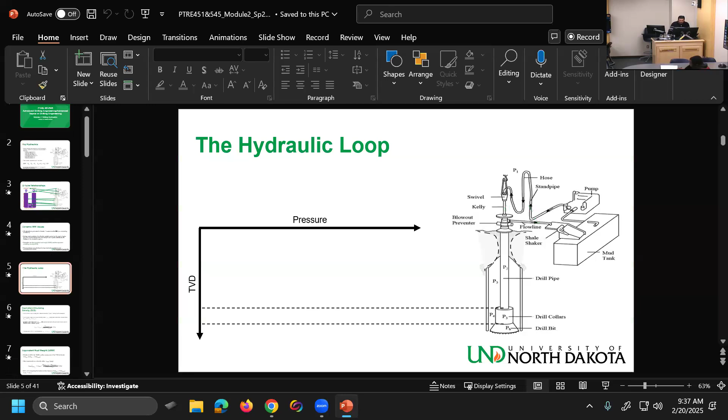I drew something wrong on the hydraulic loop. Remember, the hydraulic loop shows both hydrostatic effects, like gravity or density based on the fluid above you, and friction. I said let's assume that this is the hydraulic loop.

But now I have a different case where there's hole underneath the bit, so I'm breaking gel, in a sense you need that for the second homework. I have the bit sitting a few feet above the bottom, and it's just jetting, basically flushing out the old mud and replacing it with new mud. I told you we need to draw this extra carrot here.

What do you mean by replacing with new mud? You have mud coming in the drill string, and then you're just flushing it out. I thought that's the down side. Yeah, and the one going down is going to come back up, that's the goal. Now I told you last time that this line would be parallel to this one, and that was wrong. Then I did something else that was wrong too.

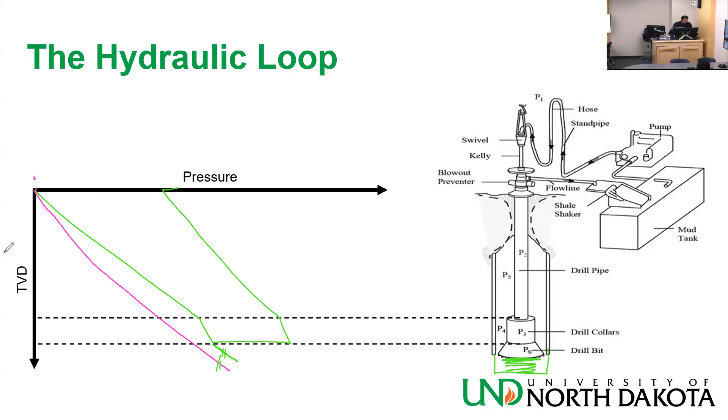We're going to see the homework now. So the mistake I made was, one, I told you this line is parallel to this one, which is not the case, and then I drew the purple or pink line wrongly like this. The slope should be, remember, the slope in this hydraulic loop is feet over psi, not psi over feet. I always get confused with that. Anyway, that looks much more correct.

Okay, let's go to homework 2.

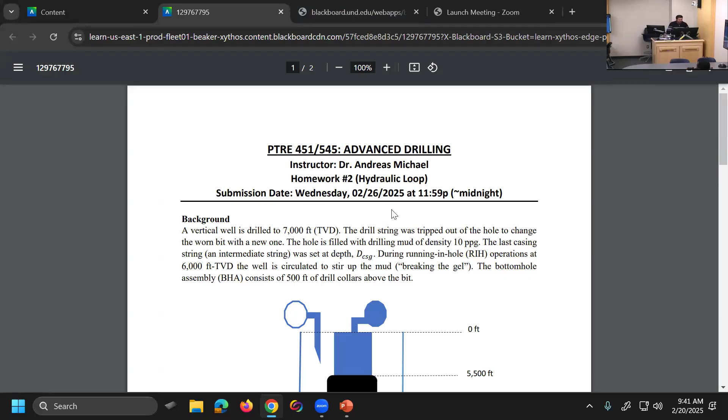Background: a vertical well is drilled to 7,000 feet true vertical depth. The drill string was tripped out of the hole to change the worn bit with a new one. The hole is filled with drilling mud of density 10 ppg. The last casing string, which was an intermediate string, was at depth DCSG, the casing shoe depth.

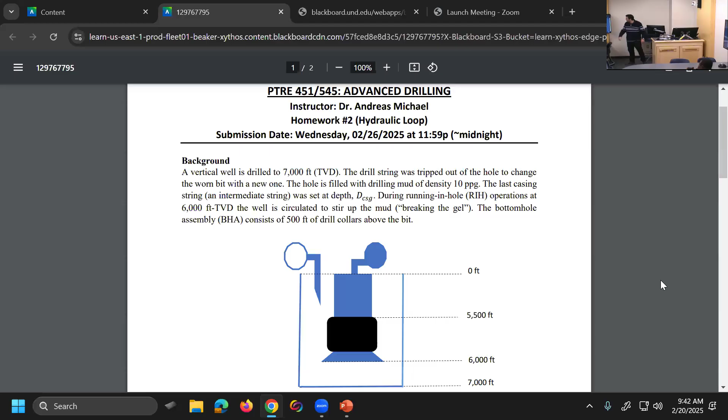During running in the hole (RIH) operations at 6,000 feet TVD, the well is circulated to stir up the mud. It's called breaking the gel, you already know that. The bottom hole assembly (BHA) consists of 500 feet of drill collars above the bit. So it's this schematic that I show here.

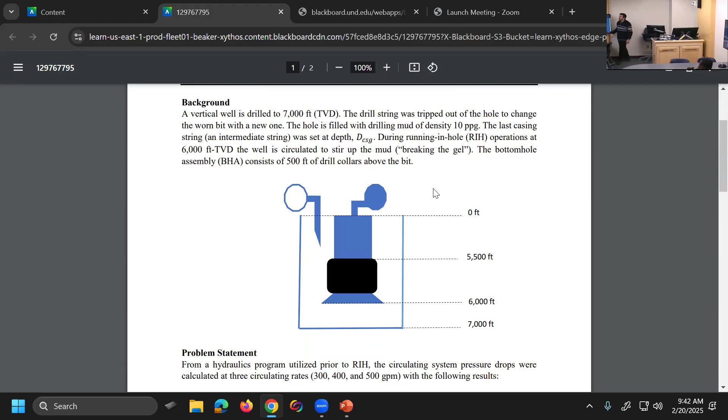The well is 7,000 feet, the bit is at 6,000 feet, the BHA is at 5,500, and the bit doesn't have any height. I drew it there, but it doesn't have a height.

Problem statement: from a hydraulics program utilized prior to RIH, the circulating system pressure drops were calculated at 3 circulating rates, 300, 400, and 500 GPM with the following results. These are friction losses, not hydrostatic losses and gains, just frictional losses.

And I give you the total and the breakdown on each component. Surface equipment, you lose 36. Inside the drill pipe, you lose 262. Then inside the drill collars, you lose 100. Then across the bit, you lose 500, etc. And then on the annulus, you lose 95 and 83. And it adds up to something like 1100 for 300 GPM.

When you increase the rate, everything changes, and it adds up to a bigger value. And then changes again and changes again, depending on the rate. Now, mud pump output standpipe pressures at the surface - that's basically the total system pressure losses, the pressure that you measure at the standpipe, just like we did with the simulator last time.

That 1940 value that we were reading is basically the standpipe pressure, which is basically all the friction that you need to overcome to bring fluid to the surface at atmospheric level throughout the circulation system.

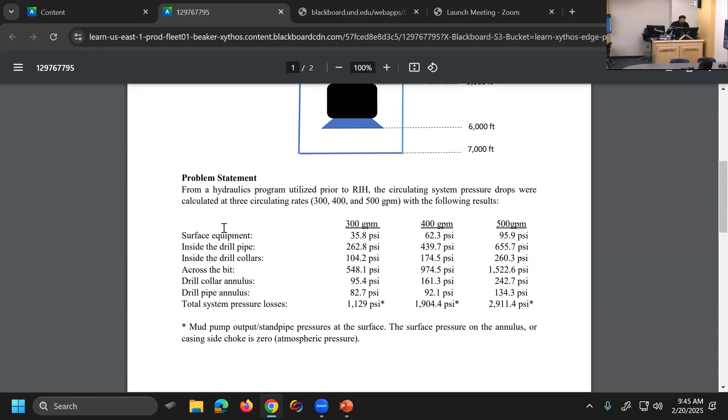Question number 1: Using Microsoft Excel, construct hydraulic loops for each of the 3 circulating rates. I want both the dynamic loop and the static loop, just like the green line and the pink line.

What is the dynamic bottom hole pressure in PSI and the equivalent mud weight at 7,000 feet true vertical depth for each of the 3 circulating rates? That means I'm asking you, what is basically the EMW at the very bottom of the hole?

So the bit stops at 6,000, right? And then you have 1,000 feet of just fluid that is not moving. So you need to add that amount after the bit. So you need to go to the hydraulic loop at the bottom of that carrot, get the pressure there, and then convert that to this, right? And it's EMW, it's not ECD.

Question number 3: what would the dynamic pressure and the corresponding EMW at the bit be as the mud flows out of the jet nozzle? So after the mud comes out of the bit, in each of the corresponding circulating rates, this is basically - you go to 6,000 feet, after the mud comes out of the bit, after you lose what you lose in the jet nozzles, what would be ECD, basically, if you are touching the bottom.

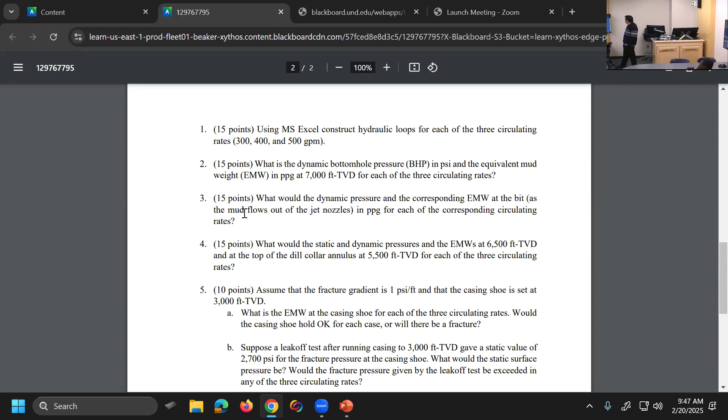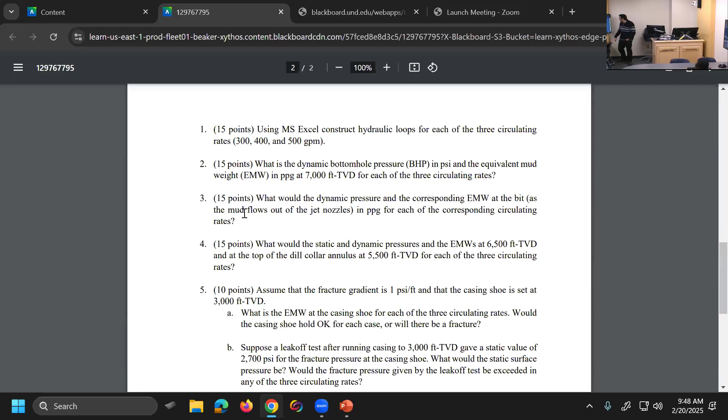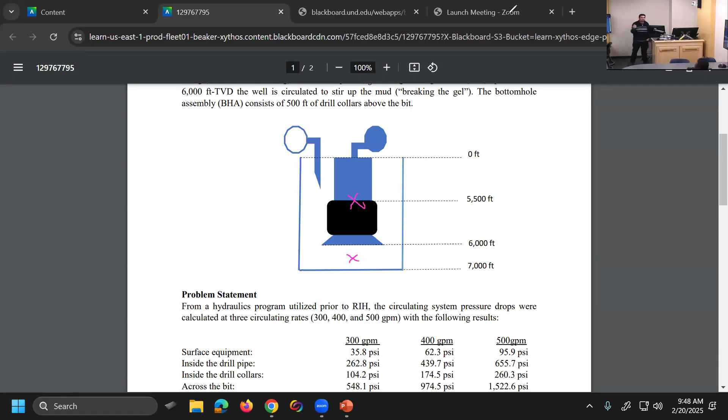What would the static and dynamic pressures and the EMWs at 6,500 feet TVD at the top of the drill collar annulus, and at the top of the drill collar annulus at 5,500 feet TVD be for each of the 3 circulating rates? I want the pressure, the static pressure. Static pressure is easy.

Let me see if I read it correctly. What would the static and dynamic pressures and EMWs be at 6,500 feet TVD and at the top of the drill collar annulus, 5,500 feet? So you need to basically go, once you have the hydraulic loop, everything is easy.

Question number 5. Assume that the fracture gradient is 1 psi per foot and that the casing shoe is set at 3,000 feet TVD. What is the EMW at the casing shoe for each of the 3 circulating rates? Will the casing shoe hold okay for each case, or will there be a fracture?

So here I have a question for you. If you want the pressure of the casing shoe, which side of the hydraulic loop are you looking at? Because there are 2 sides, right? The right side and the left side. You're looking at the casing, left side. Right side of the U-tube model, but left side of the hydraulic model. Because it's when you come out of the, so you need to look at those pressures at that depth.

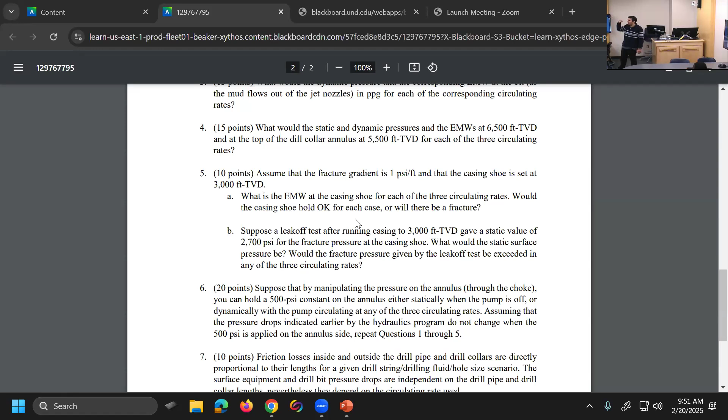Will the fracture pressure given by the leak-off test be exceeded in any of the three circulating rates? This, what will the static surface pressure be, is very important. It's going to be very important later on because when we do kick circulation, we'll be looking at the surface not to exceed that pressure, and we'll be calling it a special name, MASP, maximum allowable annular surface pressure. We're going to learn about it later, but basically it's a value that we should not be exceeding.

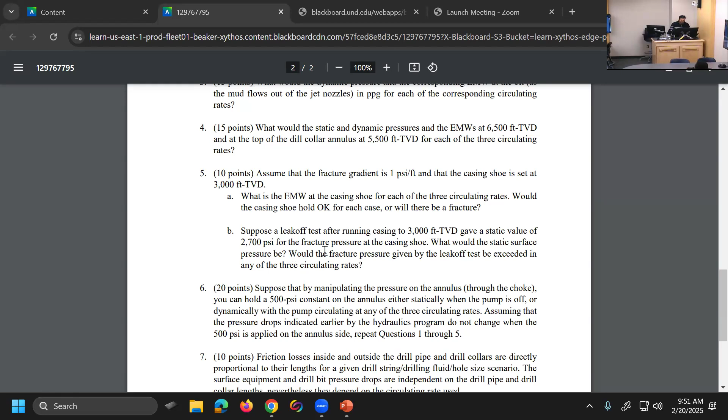If you exceed that value, you basically have a fracture. So I want you to basically give me what is the surface value that corresponds to 2,700 PSI at the casing. Very easy. You need to do it and then find if you are going to have a fracture in any of the three circulating rates.

Question number 6. Suppose that by manipulating the pressure on the annulus through the choke, you can hold a 500 PSI constant pressure on the annulus, either statically when the pump is off or dynamically with the pump circulating at any of the three circulating rates. Assuming that the pressure drops indicated earlier by the hydraulics program do not change when the 500 PSI is applied on the annulus side, repeat questions 1 through 5. So now you do the same thing again that you did in the previous questions, but with 500 on the annulus.

So the mud doesn't come out of the well at 0 PSI anymore, atmospheric. It comes out at 500, because you apply 500 on the annulus. So how do you think that would change everything? If I have 500 in the annulus, everything else stays the same. What is that going to do to the loop? You added 500 to the casing side. And then what happens to the rest of the loop? So we say we don't come up at 0 anymore, we come up at 500. What do you think that will do to the whole loop?

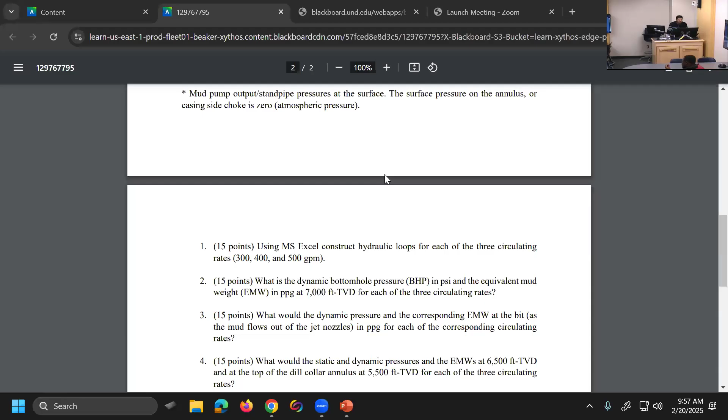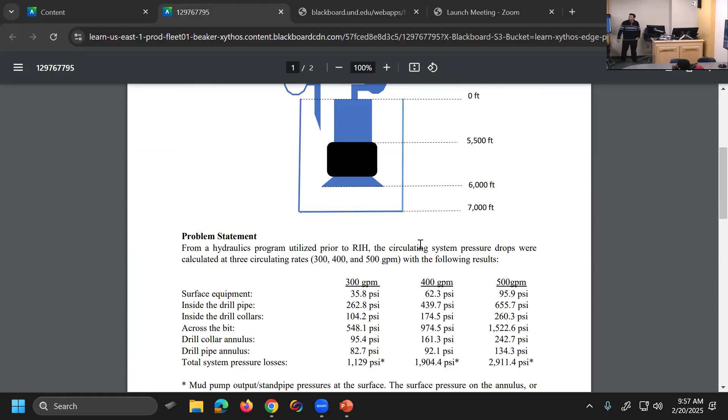It comes at 500. Now, you are still gonna be losing, like in the surface, you still lose 35.8, for instance, 262.8, blah, blah, blah, from one to another. But you need to make it to the surface with 500 psi, okay? So obviously you need to pump at 1629, for instance. Anyway, so that's about question number 6.

Question number 7: frictional losses inside and outside the drill pipe and drill collars are directly proportional to the lengths for a given drill string, drill fluid, hole scenario. I think that's understandable. The surface equipment and drill bit pressure drops are independent of the drill pipe and the drill collar lengths. Nevertheless, they depend on the circulating rate used, as you can imagine.

So the bigger the well, the bigger the drill pipe, the more the friction that you're gonna have, right? So, I mean, if I gave you frictional losses as like 262 psi, I can give you the pressure losses as something like in psi per foot of drill pipe. It's not a problem if I give it to you like this. Okay, very nice.

After RIH to 7,000 feet TVD with a new bit, normal drilling activity is resumed with the pressure on the annulus side back to atmospheric. Okay, so we went back to 0 on the annulus. Neglecting any mud density changes due to cuttings in the annulus flow, which will increase friction normally, but neglect that.

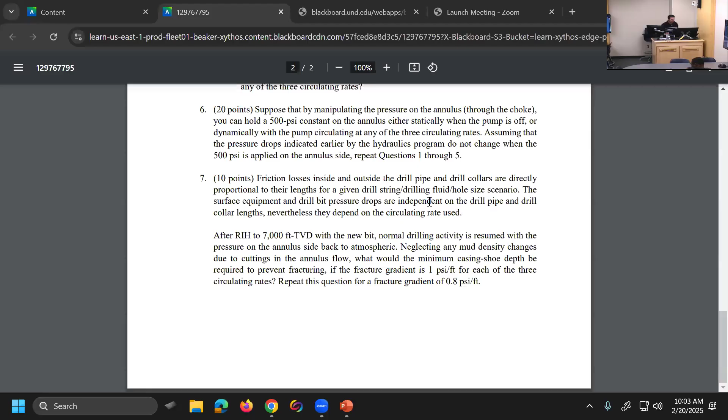The left side. If the right side touches, you don't care, because that's inside the steel, inside the drill string, so you don't care about that. Graphically is much easier. In the solution key I have it graphically, but you can do it mathematically too. It's an easy answer.

A lot of those questions are easier than what they look like, but I prefer that you guys start early so that if you get lost on the plotting in Excel, you have enough time to fix everything. It shouldn't be that hard of a homework.

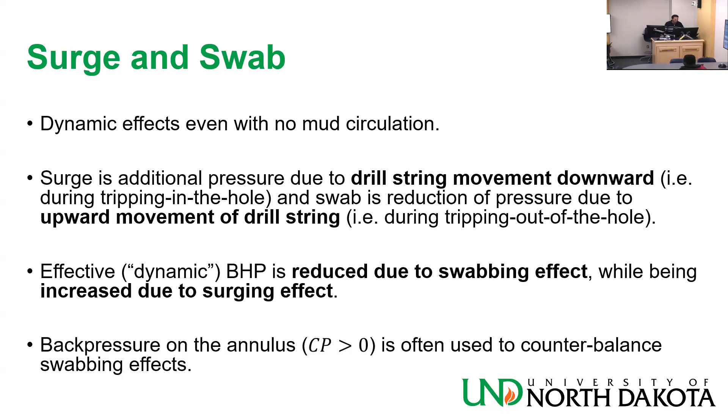Kalu didn't go to Houston, he stayed over, they canceled their flight. I don't know why they pick Groundhog because this year the weather is not bad. Should have picked Fargo then. But still, I never heard of a flight cancelled like that. So he actually didn't cancel, they rescheduled it, and in that effect they'll be missing their flights at the next one, Minneapolis. Yes, they will. That's the problem with this place, you cannot leave, or you can drive and it takes you the whole day.

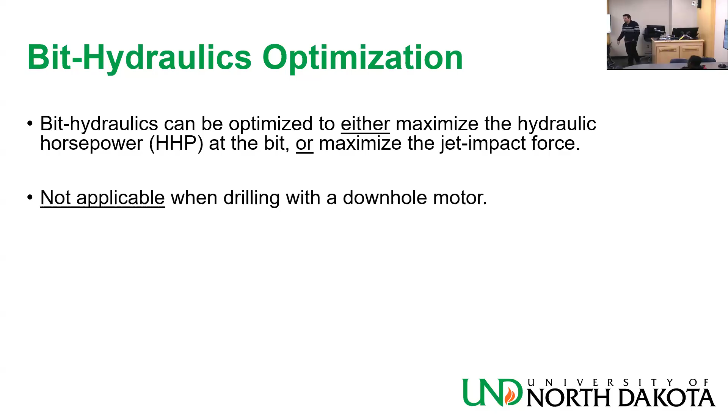This is not applicable if you have a downhole motor, because then you have an external source of energy to the bit, between the surface and the bit. So we say here it won't be applicable.

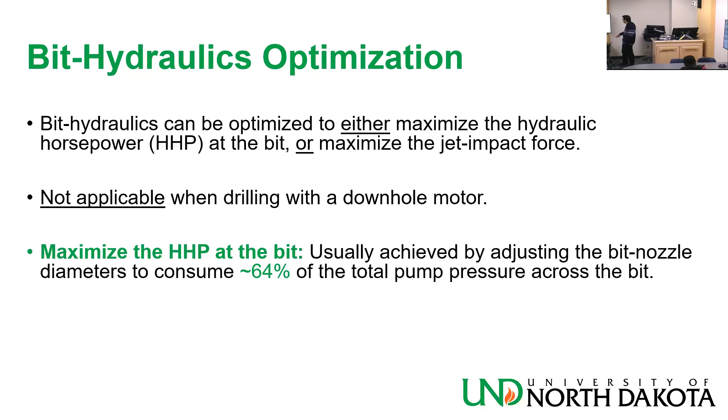If you want to maximize the hydraulic horsepower of the bit, it is usually achieved by adjusting the bit nozzle diameter to consume 64% of the total pump pressure across the bit. Now, this is not a hard value, it's an average rule of thumb.

It's not like if I ask how much of the total pump pressure is lost across the bit, if you maximize for maximum hydraulic horsepower, you take the total frictional losses times 0.64 and tell me that's the answer. I had some people the first time I was teaching the class do that. I'm giving you a standard convention, it's a rule of thumb.

It's a rule of thumb, because if you maximize for the jet impact force, it would be about 46, a smaller portion.

That means, remember when I said the pressure that you lose in the bit jet nozzles is very important, because that's used to make hole, that's related to your ROP. That's what I was referring to: that delta P across the bit, the pressure change across the bit. Very, very, very important.

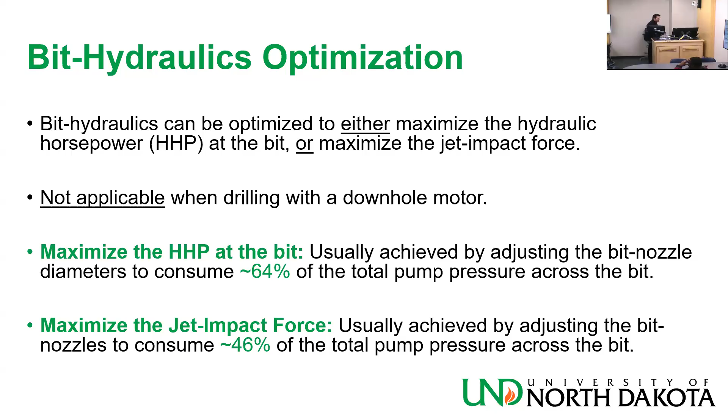So you will see how these values are derived, where they come from more or less. But don't use them as an exact answer.

So the hydraulic horsepower on the bit is calculated using this equation. And it has a conversion factor very famous for mechanical engineers, 1714, in the denominator. In that case, Q is in gallons per minute.

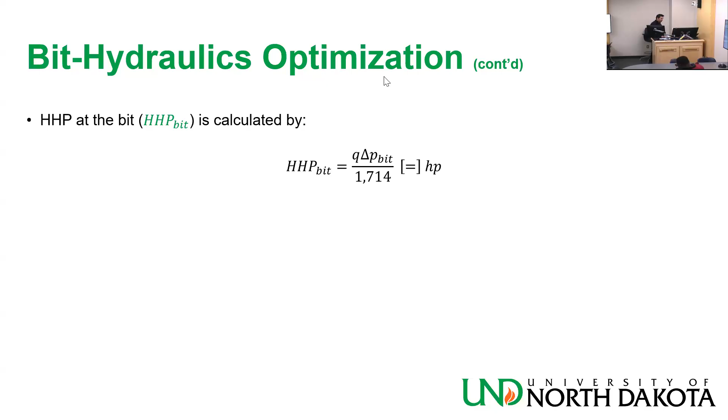That's the flow rate through the bit from the active nozzles. You may have nozzles that are plugged. There is also a patent for nozzles that change diameter from the surface, but it doesn't work very well from what I hear.

And delta P bit in PSI is the pressure drop across the bit. That part in homework 2 that says the pressure losses through the bit nozzles, that's basically what it is.

So this is the equation that you try to optimize. From there, you can divide that horsepower value by the total square inch area of the nozzles. The nozzles are circular, right?

You generally have 3 nozzles on the bit, but you may have 5, you may have more, you don't know. The surface area of those nozzles is a value in square inches, the cross-sectional area of the nozzle. If the bit is looking at you, I don't have one to show, but it has nozzle 1, nozzle 2, nozzle 3, and they have area, right?

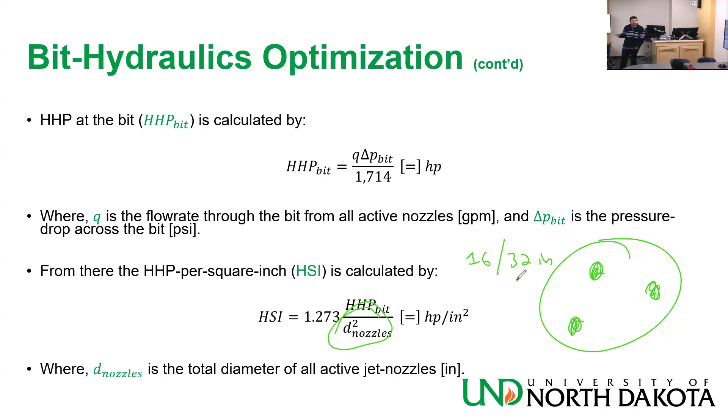So you square all of them: 16 divided by 32, all squared. You take this 16 over 32, that's 0.5. Then you have three nozzles, so 0.5 times 3, that's basically the number of nozzles.

But in general, what I wanted to say, forget about the number of nozzles. What you will put here is basically a value in inches, not 32nds of an inch. If it's 16 over 32, you will put half.

Now, if there are many nozzles, and that's going to be the case on your homework 3, you need to find an equivalent diameter. So take this value, add it all up, and convert it to an equivalent diameter, as if it was one big thing.

You take an average—well, not exactly an average, since they are all the same, the average would be the same, right? So you take the total area, and then you divide by the number.

You take the total area. We'll see when the homework comes, don't worry about homework 3 for now. If we combine these three, we get something like a bigger area, right? That area has an equivalent diameter. This is what you will see—I will explain it when I'm covering homework 3 next week, so don't worry about it for now. Homework 3 is going to be slightly easier than homework 2, less time consuming, but you need to do some thinking.

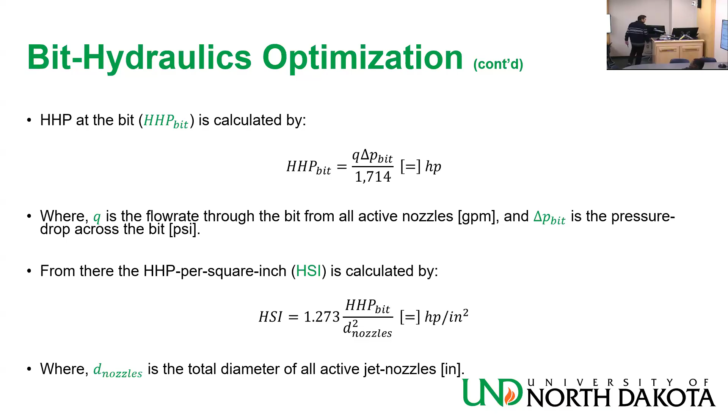So drilling fluid rheology—do you know what rheology is? It's how a fluid behaves. Just like in geomechanics we had the constitutive model, which told you how the rock, the solid, changes in regard to stress and deformation. We talked in geomechanics about stress and strain being related to each other, and there were about six moduli, and you had to have two to get the other four. That's called constitutive relations or a constitutive model—how stress and deformation interact.

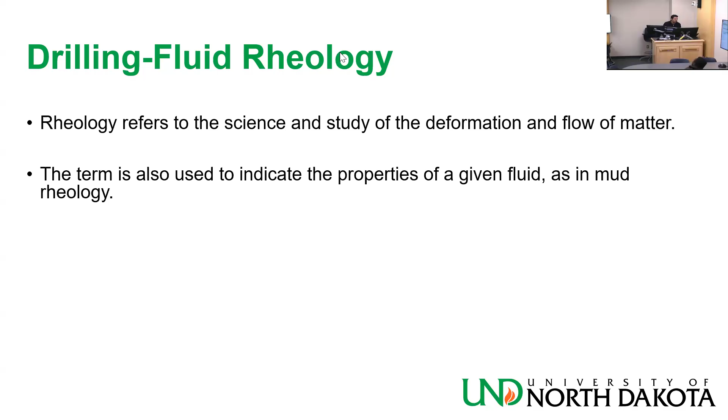For fluids, we have rheology. That is, I apply this stress on the mud and I'm getting this kind of flow. I'm applying this shear stress and I get this shear rate, basically a rate of flow. There are several rheological models, as we call them. Rheology refers to the science and study of the deformation and flow of matter. Flow is the most important word here—it basically tells you that you are dealing with a fluid. The term is also used to indicate properties of a given fluid, as in 'the rheology of the mud.'

Now, models describe the fluid's shear rate—how fast it moves—versus the applied shear stress, how much you need to stress it to get that movement. Those two are related, just like stress and deformation in geomechanics. One brings the other: I apply stress, I get movement.

When I'm using a rheometer, I make the mud move, and I measure how much stress I need to input for the mud to move at that rate—that's basically what the rheometer gives me. We're going to see that, don't worry.

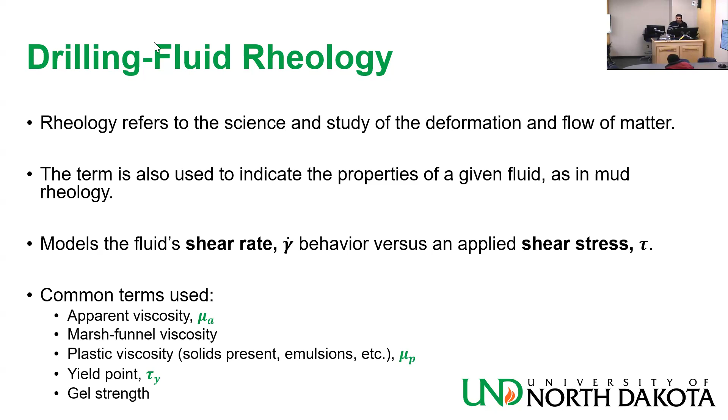Common terms used to describe rheological behavior: apparent viscosity, Marsh funnel viscosity, plastic viscosity, yield point (tau y), gel strength, etc. And these are the common models that are used for muds—they are not the only models used, but they are pretty common.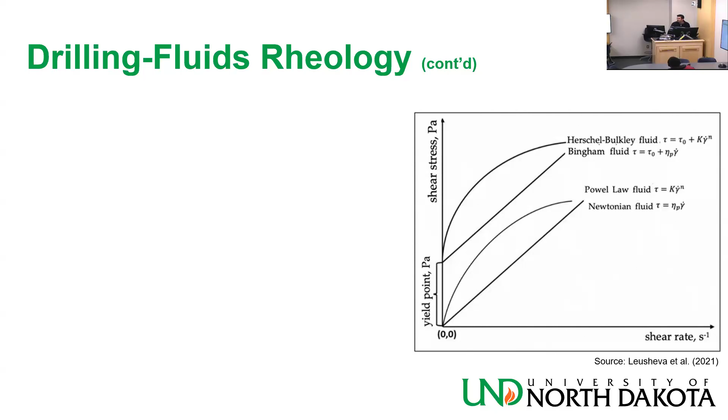One type is this straight line in the middle. Let's use this. What does this indicate?

So this plot has shear rate on the horizontal axis, shear stress on the vertical axis. It tells you to move this much, you need to apply this much stress. This is the only thing that is saying.

Something that's a little bit counterintuitive: in many other science disciplines, we have the independent variable on the horizontal axis, and the dependent variable that changes in reaction on the vertical axis. Now we have the opposite. But this is how it's typically used in rheology.

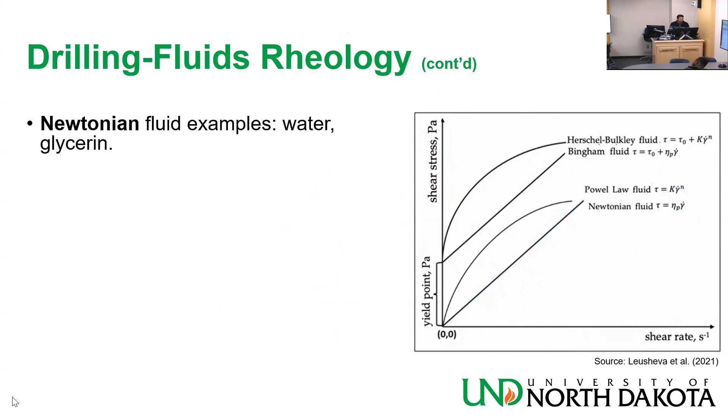It's the Bingham plastic model. Bingham plastic is the same as Newtonian, but it has what we call a yield point. A good example of that is toothpaste. Another good example, I think, is ketchup. Why is this the case?

You apply this stress, nothing happens, no motion. This stress, no motion. This stress, no motion. You apply a little bit more and you get a little bit of motion. After that, I apply this and I get proportional motion. So I have no motion until I hit the yield point, and after that I'm facing a constant viscosity.

Viscosity stays constant once I have motion. So when I don't have motion, let's just say the viscosity is infinite. But after I get motion, the viscosity doesn't change, it's still the same. So with toothpaste, I need to apply some stress to make it move, but after that it's pretty proportional.

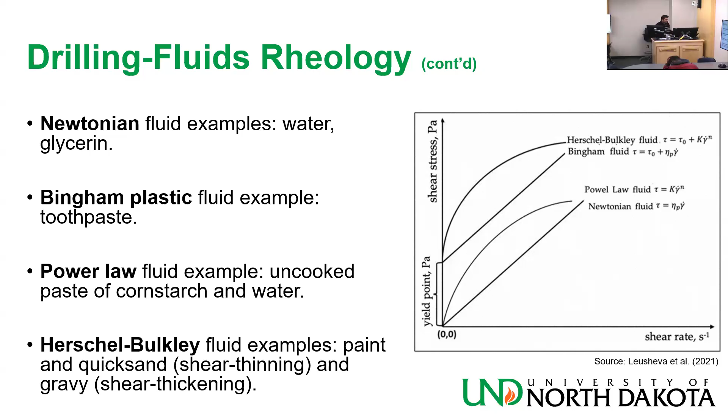Anyway, these are the rheology models, typical rheology models for drilling. Okay, now how do we relate bit hydraulics to that? That's a good question, because this is what we want to do ultimately.

Okay, for maximizing hydraulic horsepower on the bit, we have HHP bit, the horsepower that is lost on the bit, which actually does real work, right? And HHPX is all other frictional losses.

Where you have friction and you have pressure, you have horsepower, right? Because pressure and rate—you are pumping, right? And you're having the pressure losses to friction. So you are having horsepower losses.

So I rearrange this equation a little bit for HHP bit, which is my goal. And then I convert to Q times delta P total divided by 1714. You have seen this equation before.

And for HHPX, I have Q, the same Q because I'm pumping at the same rate, times delta PX, divided by this 1714. The delta PX is all the losses to friction added together. That is not going to the bit—everything else that is not on the bit.

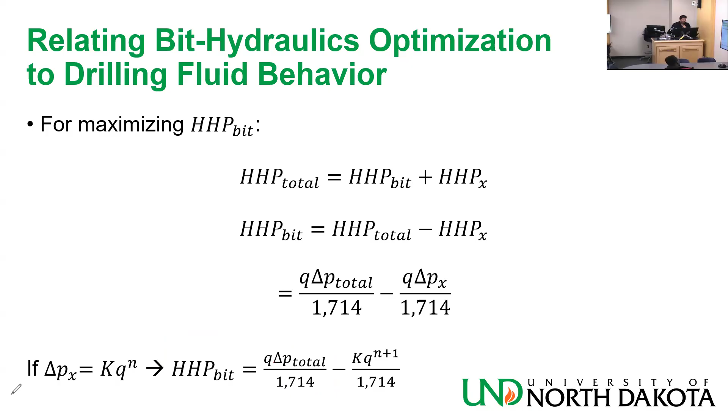Okay, that's how I ended up to this equation. And I set it equal to 0, because where HHP at the bit is maximized is where its derivative turns to 0. Okay, so I move this to that side, get rid of the 1714s, and do some other manipulation.

Eventually, I get delta P total equals to K times n plus 1 times delta PX. Remember, K and N you know from your rheological model—you know it easily, like you are going to see in the homework.

Then what is delta px? We already said from before, delta px is delta p total minus delta pb. It's whatever frictional losses are not taking place at the jet nozzles throughout the circulation system. So I replace them with that, and I move the delta p total to the left-hand side. I end up with this equation, which after some algebraic manipulation becomes this.

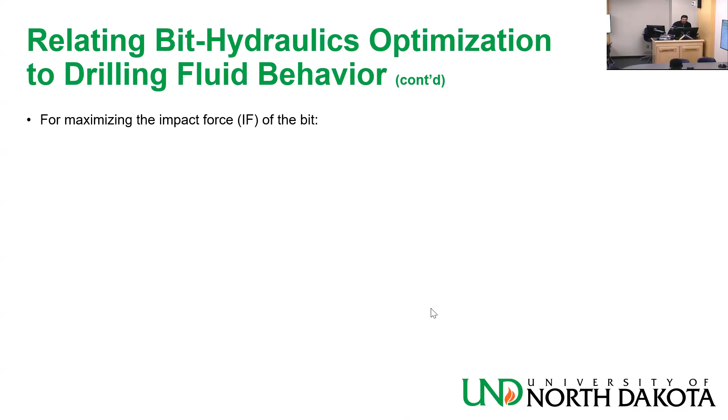Now, if you want to maximize for the jet impact force on the bit, you will end up with something like this. Again, it's a long equation, a long derivation, but this is what you end up with. What is the value when n is equal to 1? That is 1/3. What is the value when n is equal to 2? That's going to be half. So we said 1/3 to 1/2.

Okay, now the impact force is given by this equation, and I know it has some random conversion factors, but yeah, it's a long derivation to get here. We need two lectures of derivation to get to that.

And then the delta px, that is the rest of the losses, basically the parasitic losses, those that you want to minimize, right, are given by 2 divided by n plus 2. I think you understand how n plus 2 divided by n plus 2 becomes 1. So you have the good losses, which is delta p bit, and the bad losses, which is delta px. And the optimal flow rate is given by this equation.

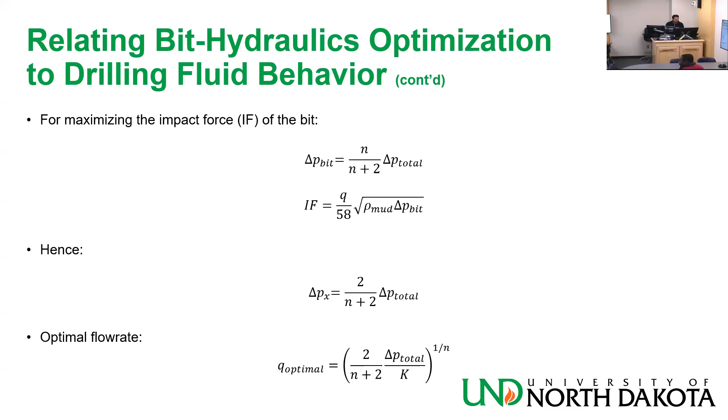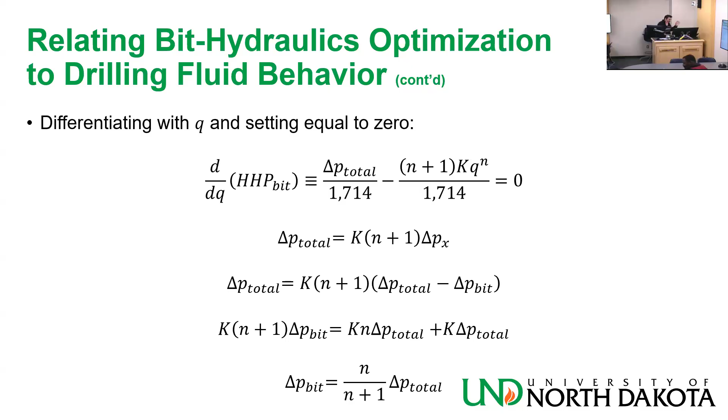So don't worry about the derivation of this stuff, but up to the derivation of this one at the bottom here, I think you can follow. After that, I will see if I'm able to find some copies of a book that has the derivation. I will put it on the useful resources folder, but you don't need to know it for exams or homework even, so don't worry about that. I just want you to know the final result in that regard. And this one, the derivation that we saw, is pretty easy.